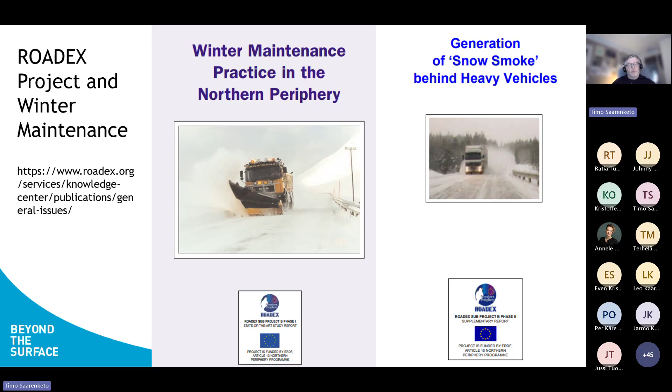But since later on we started to go through very much on the life cycle cost, and ROADEX started to focus also on benefit and savings and achieving more with less. There's one report published, I think in 2012 or 13, about these issues.

And in general, talking very much about budget cuts, for instance here in Finland, really big political issues with the funding of government needing to cut funding almost every area, and sooner or later it probably hit also the road maintenance.

Anyway, in early ROADEX project, we did research also on how organizations in general react. There were three issues: accept the situation and don't change practices, just blame politicians, the classic one in many countries. Then adopt new technology, improve practices, improve productivity, and you can do more with slightly less resources. And finally the third was the impact of vehicles that are damaging the roadway, because heavy vehicles are the main issue, especially on low volume roads.

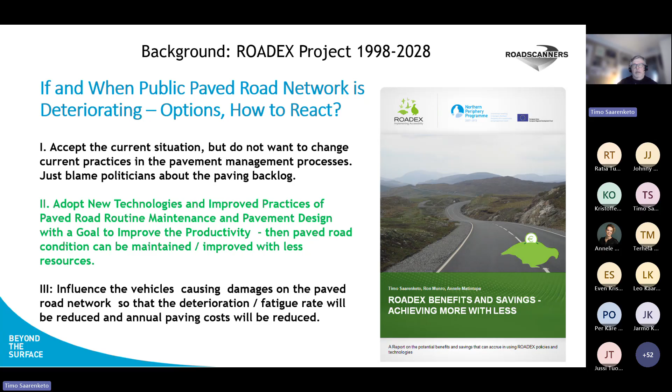We have done that especially on forest roads, not so much on gravel roads, and especially not so much on paved roads, but that's also an issue. But this number two is what we've been mainly working on.

Talking about winter maintenance, it's very closely related to drainage. Here's just one example of a winter drainage project that we did in 2009, 2010, 2011, 2012.

This was a longer report around the Rovaniemi area, and for me this is a nice example about what is reactive maintenance and what is proactive maintenance. There was a frost bump in this private access road junction.

The GPR data shows that they made a soil replacement because of this bump in 2009. But then in 2010 and 11, when we were monitoring these roads, you can see that the rutting IRI was lower, only 5, but still rutting was more than 20 millimeters, even though it was fixed earlier.

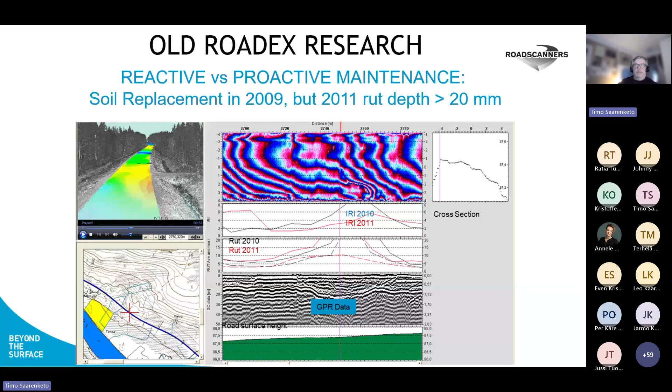So basically, instead of doing a relatively expensive soil replacement, you should be going and fixing the culvert and drainage system on this private access road junction. It would be thousands and thousands cheaper as a solution. So fixing the root cause instead of being reactive with the symptoms always pays back.

Anyway, one title of this presentation is about this life cycle cost in general. The question is that in road maintenance management, it's quite much discussed, but very seldom really calculated in a scientific way. So why do we need that?

Of course, the main basic issue in asset management is that a road is not a one-time expense, but a long-term asset. The benefit is, first of all, that we minimize the total cost, so we can choose the best fit maintenance strategies, and that cost is least or less over the lifetime.

Then we can do, so to say, correct measurement in correct places and correct time. So treatment at the right time, also preventative maintenance is the other issue, which is quite like using de-ice, preventative de-icing salt is a nice example of preventative maintenance also.

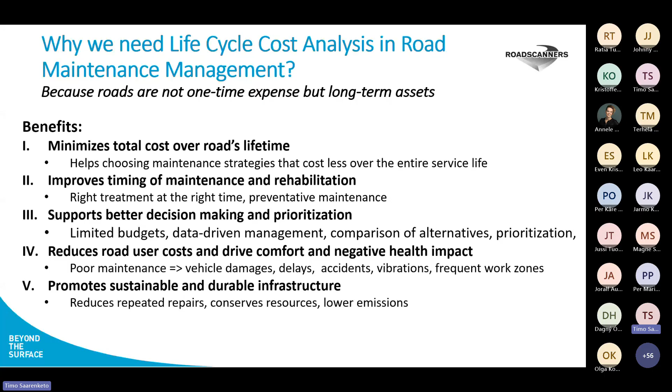The information I'm sharing now is basically coming from the Pehko project that started in 2015 here in Rovaniemi, northern Finland and central Finland, and then in 2018 it was expanded to the Hyvinkää area, very close to Helsinki, our capital area, with very high traffic volume roads and a slightly different type of network. The environment is also different.

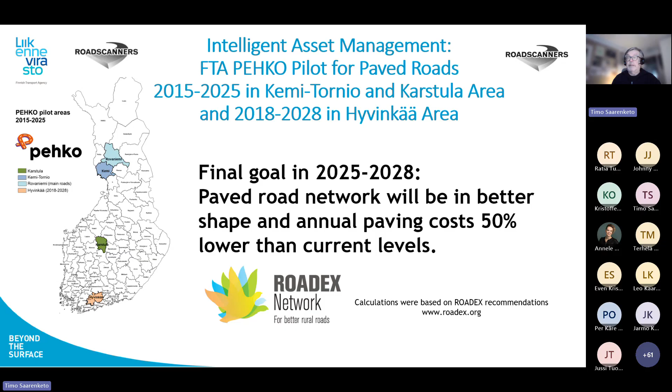The ambitious goal in 2015 was that by 2025 we should have annual paving costs 50% lower than 2015 levels. At the moment we are in 2026, and we know now that we didn't manage that. We managed to do savings of about 30 to 40%, but if we had resources to hit and focus on all these expensive sections, according to the calculation, then we would have been able to hit this 50% target. But we came very close anyway.

So in general, what we planned to do involved three goals. First of all, road maintenance standards, especially drainage maintenance. At that time, we didn't know how important winter maintenance also was. We calculated, based on ROADEX, that it was 10 to 30%.

Then new technologies, focusing on the weakest sections - this targeted rehabilitation - gave savings of 10 to 40%. We had evidence on that, and we have partly done that, but not so much on Pehko. And proactive maintenance has also been introduced with very promising results, but this is a very long-term change, and this process is still continuing.

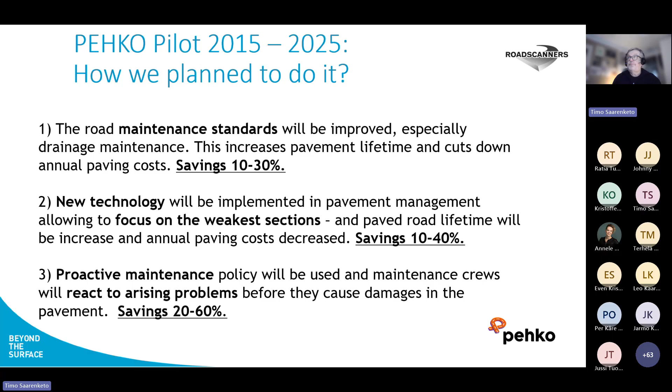We don't have too much time to go into the data collection and analysis technologies, but in general we surveyed all the roads, all the lanes in these areas with the Road Doctor survey, with GPR, LiDAR, videos and accelerometers, to get the structural and surface condition. That was done every year, and then with the Greenwood TSD - actually Danish TSD made by Greenwood - we surveyed every 5 years. So we now have from Lapland and central Finland three measurements 5 years apart.

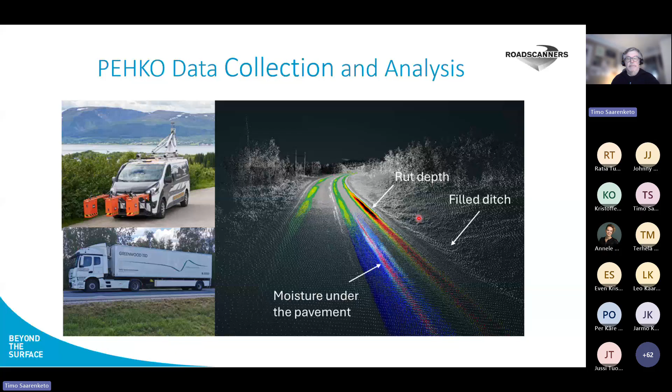What we've been doing is analyzing all this data, bringing it partly to the point cloud to show, like in these photos, a very nice connection - what happens if your outer slope is unstable and starts to fill the ditches. Let me use a laser pointer. So water in the ditches flows and meets these filled places, so it goes under the road structure - here you see moisture under the pavement structure - and then it saturates the road shoulder and causes deformation. A nice example of how important this is, and how important it is to clear the ditches.

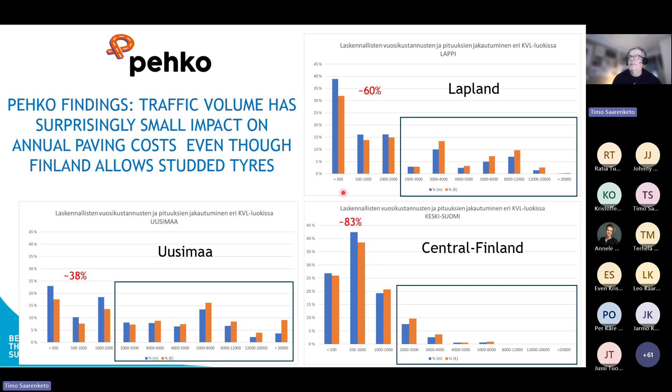What you can also see is that in terms of the amount of these roads, in central Finland it's 80%, from Uusimaa - which is probably the most urban area - almost 40%, and then Lapland 60%. But most of the roads in Finland are still roads where our AADT is less than 2,000.

Another issue on life cycle cost is how these costs are distributed across different classes. Here is a comparison across all these areas - central Finland, Lapland, and Uusimaa - where green bars show life cycle costs less than 1.2 euros per meter per year, and black ones are more than 10 euros. In general, we'd expect to see this black, or red ones at about 6 euros per meter - roughly five times higher - only on high volume roads, but surprisingly high amounts of black and red causing the pavement backlog can also be seen on low volume roads, which explains the difference between the orange and blue bars in the previous charts.

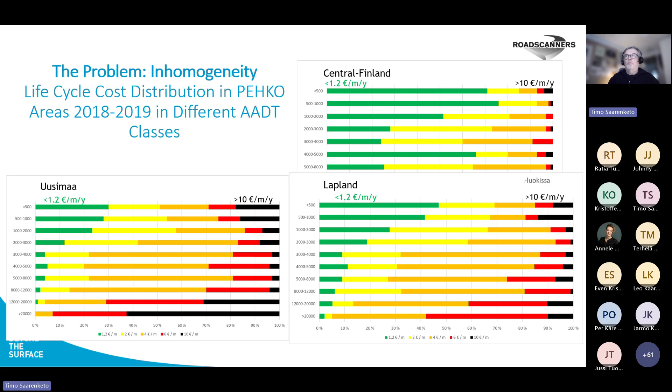At this time, what we can see in these photos is that the only sections where we see very big wear from studded tires is where cars are braking or accelerating, like intersections. There you can see this wear, like in this photo.

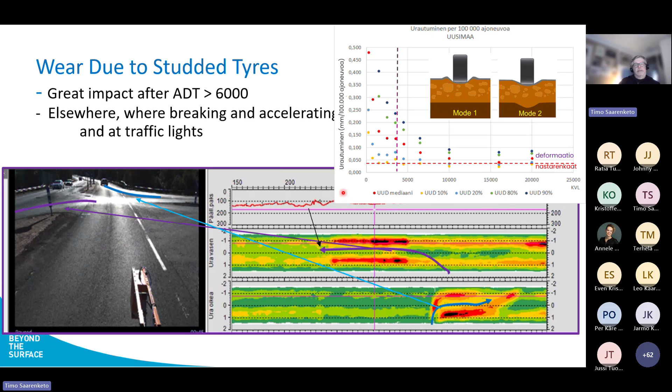Even in high volume roads, this is only about 40 to 50%. But over there you can also see deformation, other types of deformation. Basically everything above this horizontal red line is deformation or some other related problem - mode 1 rutting or mode 2 rutting.

We don't go too much into structural issues, but here's the summary of the Pehko project that I have shown many times already. We found basically 7 reasons for paving backlog in Finland: heavy trucks, weak subgrade, heavy trucks again, too thin pavement in certain areas - these are pavement design problems.

Then drainage problems: private access road problems, drainage problems, side ditches, winter drainage problems, especially delayed removal of snow walls, and then extensive use of de-icing salt, especially on thin pavements. Later on we could say the 8th problem is probably insufficient funding and too reactive maintenance policies.

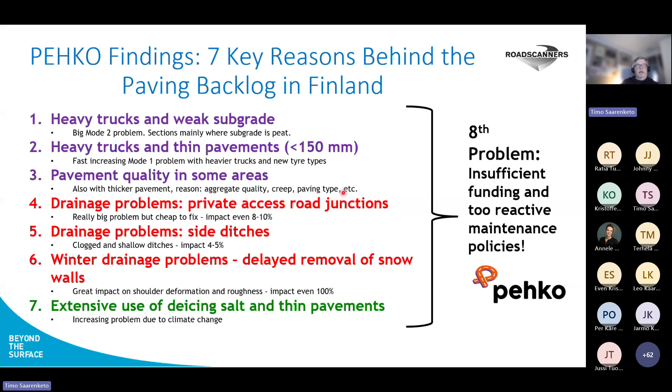But now we will focus very much on winter maintenance issues. If we want to list these critical winter maintenance issues affecting the life cycle cost on maintenance, we can find at least nine things that you can use as a checklist, that you have to recognize and keep in mind.

First of all, lowering snow walls in time, then preventative removal of snow walls. Lowering snow walls means lowering them to the 20 centimeter level, and preventative removal means taking the rest of the snow walls away too, and that should be done before the snow starts to melt. Then private access road junctions, especially with missing or frozen culverts, bus stops, rest areas.

No storage of snow in motorway center areas is one thing I don't have time to talk about today, but keeping the snow away from there - we have very good experience from Central Europe on how important that is. Missing transverse crack sealing affects things too. Then transverse cracks, tenting issues with transverse cracks, and high usage of salt.

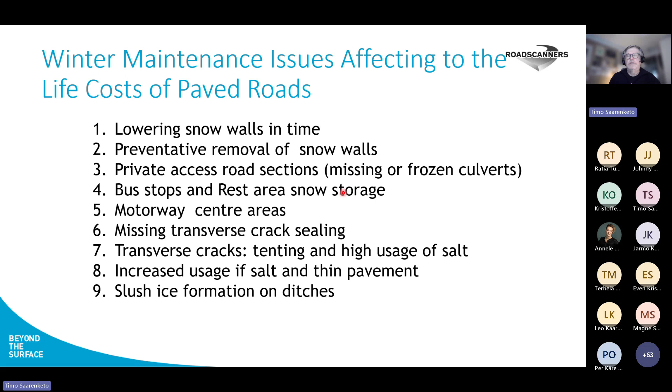Then increased usage of de-icing salt on thin pavement, and then slush ice formation in ditches. The slush ice was a big problem in 2012 to 2014, but when ROADEX started, for some reason we haven't had too much problem since then.

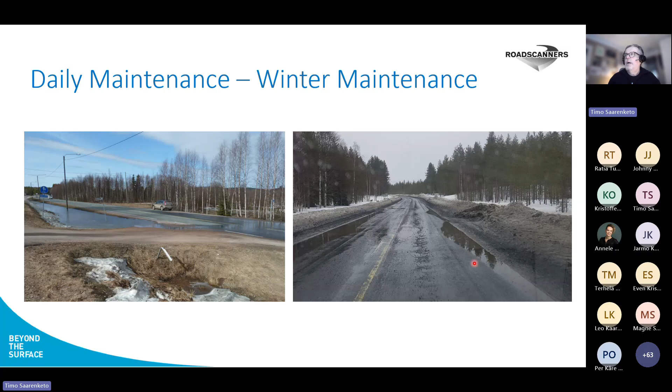Anyway, talking about winter maintenance, here in one photo are the 2 biggest problems: private access missing or totally frozen private access road junctions, and delayed removal of snow. Now we will first focus on that.

So first of all, delayed removal of snow. If you see a wet surface - these photos are from 2015 - when we started, you could see even in February, and especially then in March and early April, these kinds of photos where water was lying on the pavement. Then in late April on this section where the water was lying, you could see, even though it hadn't been raining for days and days, water still pushing through the pavement to the road surface, which is a clear indication of really big weakness in the pavement.

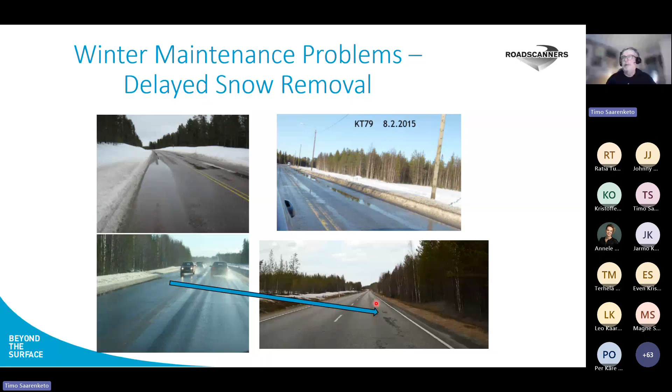Also in 2015, there was quite a lot of discussion about problems in the roads during springtime, and what was very interesting at that time - I collected some news, Finnish TV news, and all the photos of the really bad potholes were from sections where there were guardrails.

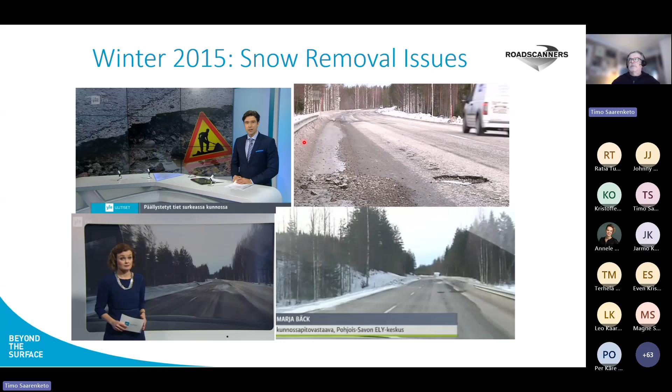And you could see on the roads also, potholes were developing. Guardrails, and behind the guardrail there were high snow walls and they were wet. So most of them, what we did also research on that.

Some reason why this happens, here's a graphic explanation of what is happening. So in the winter time, when it's cold and you are leaving the snow walls, like in January, snow walls over there, it's minus degrees, but then when the first warm days come, it has been now the last 2 days in Finland where it's +5.

So now you have the deeper structures at -4 degrees, snow is melting and starting to fill the pavement. But under the pavement, the temperature goes between 0 and -5, which is the area where cryosuction, very high negative pore water pressure, is starting to absorb water from this. So it is really sucking the water under the pavement.

And then comes the next freezing days, like it will be still coming here, -10 degrees. It goes again below -1 degree, and that means you start to develop ice lenses, which in Luleå Technical University have been called tertiary ice lenses, pushing the road shoulder up, and then it saturates the pavement, and finally it starts to melt. When this material starts to melt, you have a very high deformation in the road shoulders.

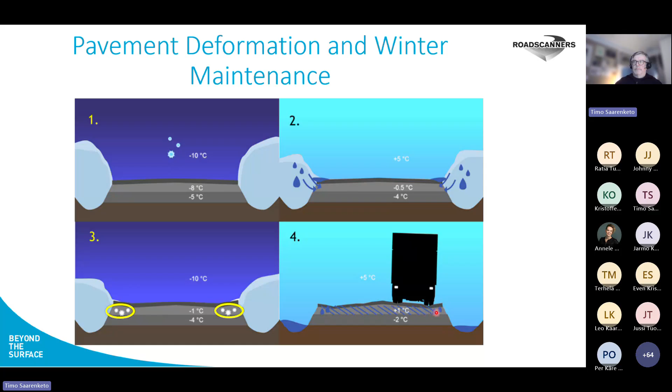This can also be seen in Aurora Research, this autonomous ITS Aurora Research Center, where we, with Tampere University, had instrumented sections. At 32 centimeters on the base course under the pavement, you can see on the section where the air temperature, this blue one, starts to be positive and started to melt the snow. This is 2018, and this is 2019.

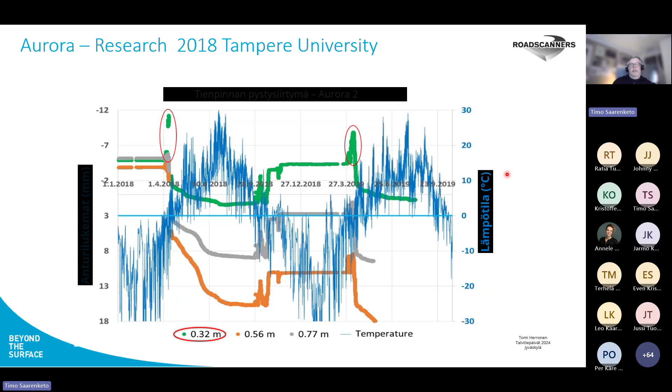So water goes under the pavement, and in this case, even at 32 centimeters deep, the displacement is about 6 to 7 millimeters. In 2018, it was only about 4 to 5 millimeters. But anyway, it is quite a big one, meaning that there are ice lenses just under the pavement.

What can be done, and what should be done according to the specification, and what was started on the Pehko project, was that we started lowering the snow walls to 20 centimeters. Why was it not totally removed? Because people were afraid, since drivers have been used to having snow walls to know where the road is, so you had to have some kind of snow wall. But we followed the Swedish practices to lower the snow walls and also remove the snow behind the guardrails.

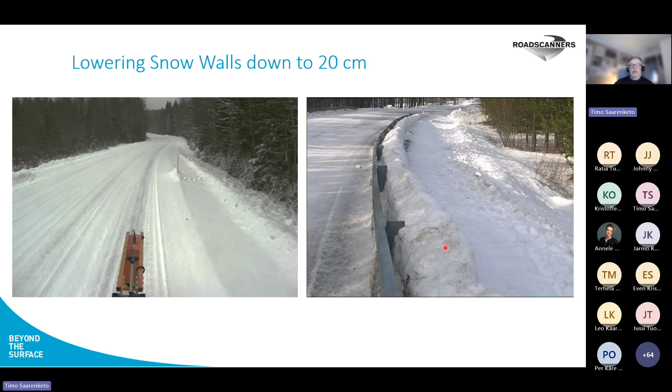And according to the test, it had a really great impact on these sections. The only issues were in some areas, for instance with reflection poles, like here, not everybody had machinery to remove snow behind the reflection poles, and it was left. Then you could start to see that even such a small amount of snow could saturate things, and you could see a deformation, edge deformation.

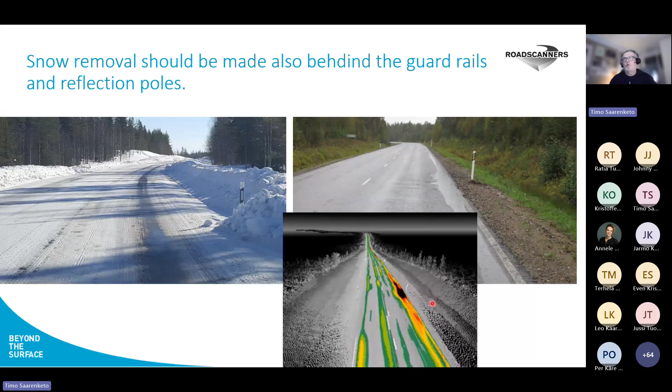Here's a point cloud rutting map showing also the reflection pole exactly on the section. So even this amount of snow could cause so much frost heave and deformation that you have problems in the road shoulder. So this, in general, was okay.

Anyway, the problem in general was that especially the total removal of the snow wall, in some springs, it was not started until it was very warm weather and the climate started, or snow started to melt. And at that time, it is pretty much too late. Remembering also that if you start to remove the snow wall only after you see roads like this, and the removal takes, with one contractor, roughly 1 to 2 weeks, you are working too late.

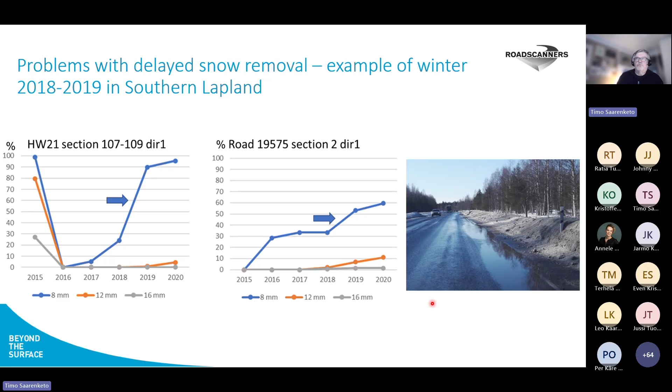So it should be preventative, and according to the ROADEX recommendation, it should be statistically done before the snow normally starts to melt. Here's an example from Lapland, in the southern Lapland area, where especially in 2018, 2019, it was delayed. Here's the rutting development on relatively new road sections, and what you can see is a really big jump in that area.

But the biggest problem was in central Finland in winter 2019-2020, where about 5 times it was snowing, and then came such warm weather that all the snow was melting, and it saturated the road section so much that, compared with the next year 2020-2021, you can see a rutting of about 2 to 3 millimeters per year, when it's normally less than 0.5 millimeter.

And what you could see when you calculate the cost, the deformation and rutting cost, the life cycle cost on these years, it was 1.12 million on this test section area, when the previous year it was 0.6 million, which is almost 2 times higher cost because of this issue.

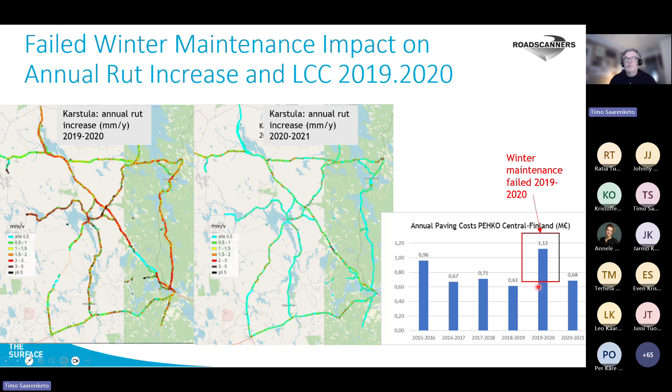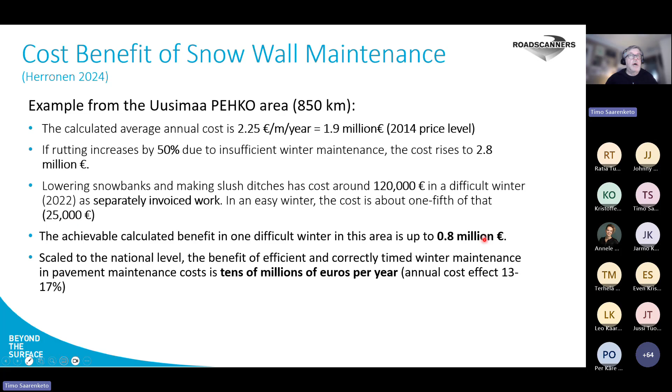And if we are scaling this to national level, first of all, annual cost effect, we can calculate about 13 to 17%. And if it's totally neglected or misused, we are talking about tens of millions of euros. So timing on that is really a big issue, and it is a traffic safety issue.

Here's a nice photo of Oulu area from 2019. In 2018 in Oulu area, lowering snow banks and removing snow was not yet practice. Here are two photos from 2018 and 2019, taken at almost exactly the same time, showing how big a difference there is on the roads. So it is definitely a traffic safety issue also.

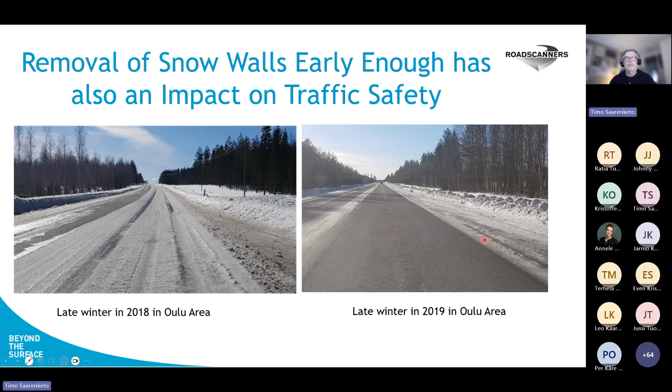Then the other issue, which was really a big surprise in Pehko, was that a single maintenance problem can be related to the drainage of these private access road junctions during the spring. Here are also a couple of frost heave photos, these point cloud photos. You can see that if you see red ones, you are around 100 millimeter frost heave, and if it's blue, there's hardly any frost heave.

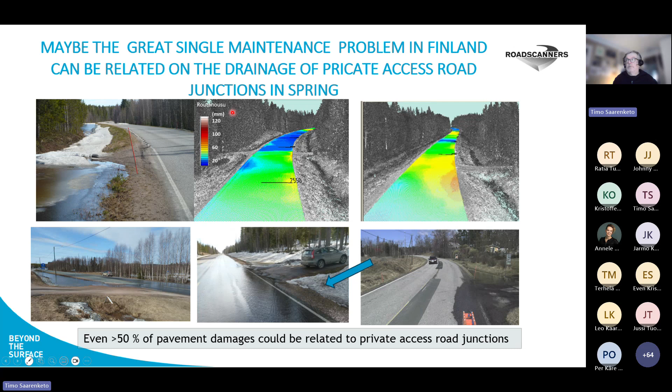But this is what we have been finding, and in ROADEX test sections, there were even more than 50% of all the pavement damages that could be related to the access road junction. That was really big. Frozen culverts or missing culverts - and why the cost, even though access road junctions are normally about 10 to 20 meters wide, but once you are measuring the impact on this access road, it is roughly 100 meters.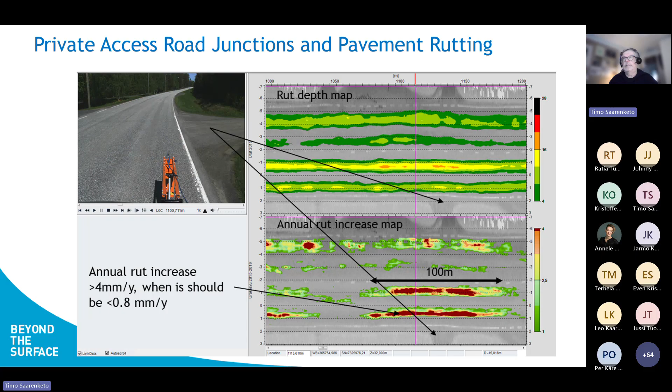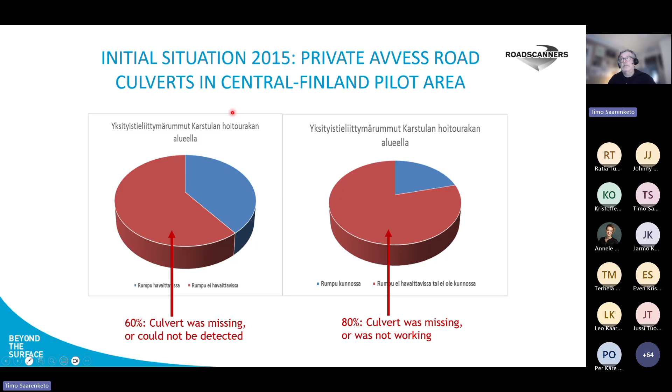And then private access road culverts in central Finland just showing the problems at the time when we started this work. So on the left hand, what you can see is how many percent of culverts were missing or couldn't be detected - we couldn't find them, so it was 60%. And when we were adding in the private access road, the culvert that was not working, it was 80%. So basically only 20% of the access road culverts were working as they were supposed to be.

And then what we did also, I started to rank them - okay, what is the worst private access road culvert and what is the rut increase, ranking them. This ranking showed that if you take the 100 worst culverts, over there we had still 7 millimeter per year, so only a 3-year lifetime. And once we went to the 500 worst culverts, it was still 3.5 millimeters. So it's average value - the overall average value was much less than 1.5 millimeter per year.

And in central Finland, it was about, I think roughly 12% of the paving budget only. And if we are talking about life cycle cost on Finland, it was 20 to 40 million - but if you are talking about how much fixing this private access road culvert would be, it would be only 40 to 60 million. So basically within 2 years, if you start to work on life cycle private access road repair, you get your money back. So payback time is extremely short.

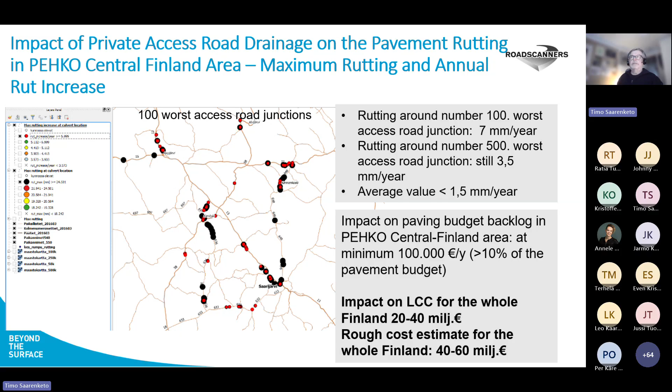Then the other issue is also like de-icing salt, thin pavement. In Finland on the main roads, the usage of salt was increased. An interesting finding, which was by the way exactly the same as experiences from Canada, is that if you start to heavily increase the usage of de-icing salt, you will have a few years of high rutting and pavement distresses. Here is a comparison of pavement thickness and annual rut increase after the increase of de-icing salt, and we could see exactly the same issue here. So this experience is from Finland.

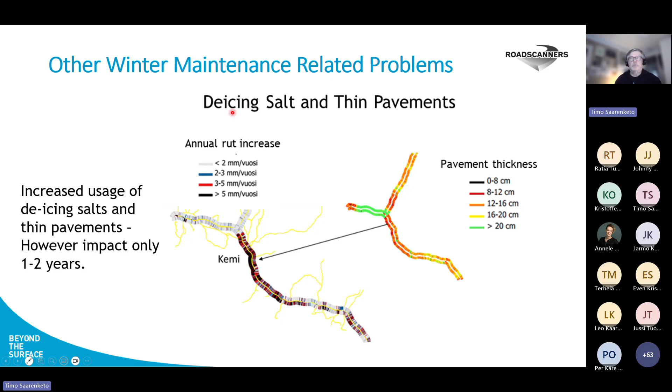The good news anyway is that this takes place over 1 or 2 years, but in our case in Finland, after year 3 you couldn't find any more of these problems.

Crack sealing, transverse cracks: if you don't seal transverse cracks, first you start to see problems in the winter time, like here in 2018, and then in 2019 you start to see already severe problems. So crack sealing, especially transverse crack sealing, is one issue that should be kept in mind, because it causes bumps.

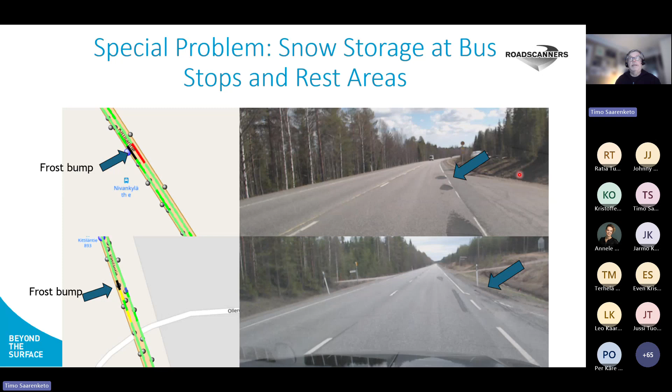If you store snow, you should make sure road maintenance ensures they don't store the snow here, because all the melting snow goes under the road and causes frost bumps.

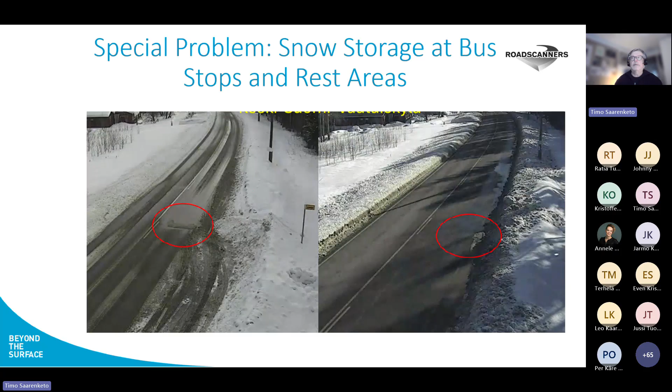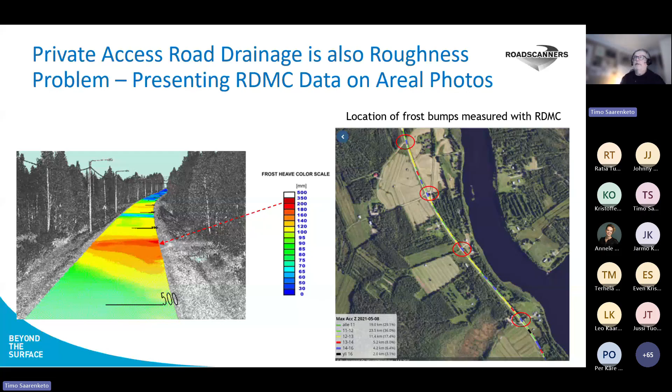For instance, in this section in Lapland, about 60% of all the frost bumps could be related to private access road junctions. Here's one example of a section from Rovaniemi towards the Kittilä area, calculated a couple of years ago. What is the main reason? We calculated in springtime all the frost bumps where IRI was higher than 6, and this is the section related to access road junctions.

Private access roads account for about 1/3, filled ditches also about 30%, and they were very much related to these access road junctions. Then standing water in the ditches and bus stops account for 10%, and 10% was also culverts with missing main road culverts, but much less than the access road issue.

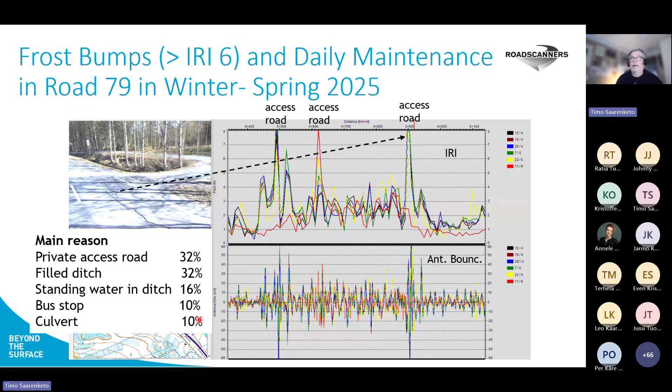So at the end, what are the potential savings on daily maintenance? What if you put all these things together? We are calculating rough estimates, and we are talking about 30 to 50% savings. At the moment in Finland, if we calculate annual maintenance cost, it's about 300 million euro per year, so we are talking about 100 to 150 million euro per year in savings.

Good news is you could start that immediately. You don't need such huge investment for daily maintenance. Once we are talking about structural problems, thicker pavements, the impact is roughly 30 to 35%.

But every 50 millimeters across the whole road network in Finland costs about 2 billion euro, so it takes tens of years. It's a long project. Roads on peat, that's not so big one, and we roughly evaluated maybe 100 to 200 million euro.

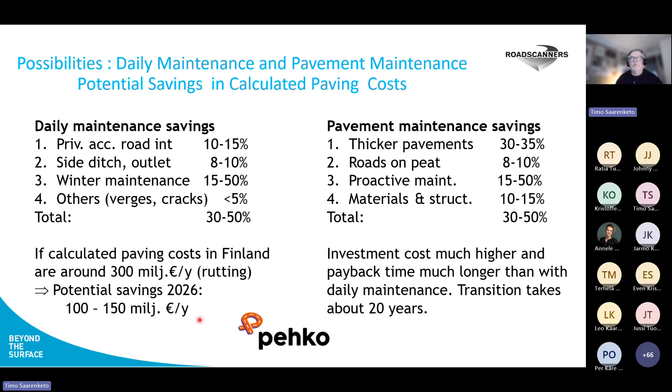Proactive maintenance, we should start that, and the material and structures impact is about 10 to 15%, but this is a very long term. Daily maintenance and winter maintenance, though, you could see the impact immediately.

So finally, conclusions and lessons learned. What we've learned is that in pavement design and programming, the return on capital is in the long term. We need to know that, so we have to have life cycle cost analysis.

And in general, thicker pavements—this is a structural issue—and much shorter sections than we have been doing before. We have to improve our structures.

But then the root cause of the problem should always be fixed, especially drainage and winter maintenance issues. Problematic drainage sections should be improved and maintained. And private access road junctions are a surprisingly big problem.

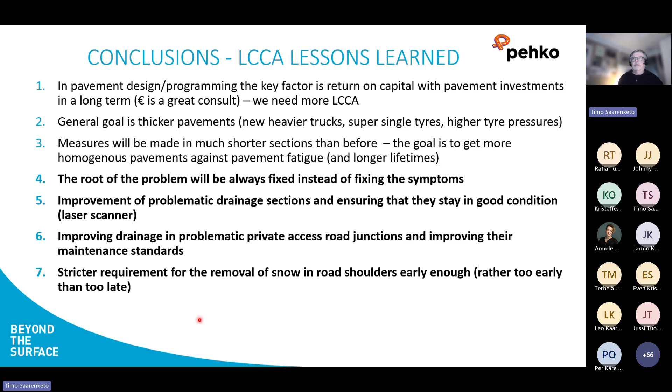And what I've seen in neighboring countries is exactly the same problem. Finally, this winter maintenance and removal of snow in the road shoulder should be done early enough—rather too early than too late.

Here's just an example of the impact of life cycle analysis, with some models and experience on that. For instance, the road network in Finland is getting older and older, so we now have routine maintenance and partly rehabilitation needs.

So if we are talking about cost analysis, it's really a huge difference when we start to use life cycle cost analysis at this time, and it's extremely beneficial. So that's about winter maintenance this time.